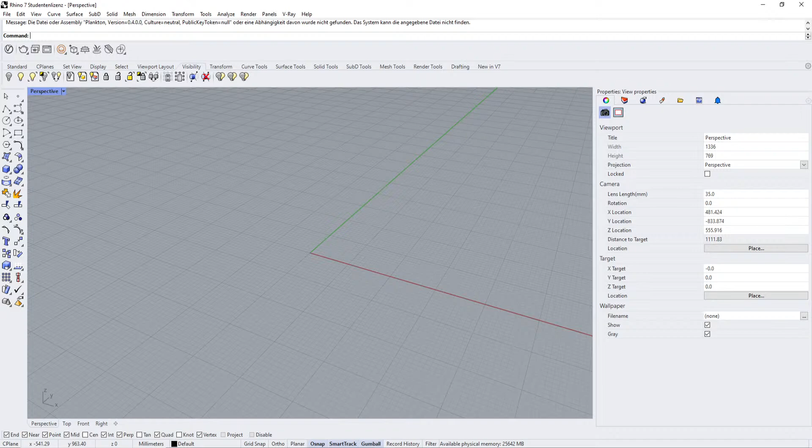Okay, I'm starting Grasshopper here right now. And while we're doing that, I think I might want to sketch out the things that we want to do as well. All right, hope you can hear me right. Yeah, I'm also fine, man. It's been a long time since I did the last video, so I think it's about time to do one.

So I'm really looking forward to this today. I was thinking about making a direct video, but I think we will do a stream instead. But yeah, I'm doing fine. How's the summer going for you if you are in the Northern Hemisphere?

Yeah, I think no one did. It's, I guess, more exhausting. It's a bit exhausting in France and Luxembourg. Yeah, right now it's also not so nice outside here for me, so I wonder if that weather will keep going on like this.

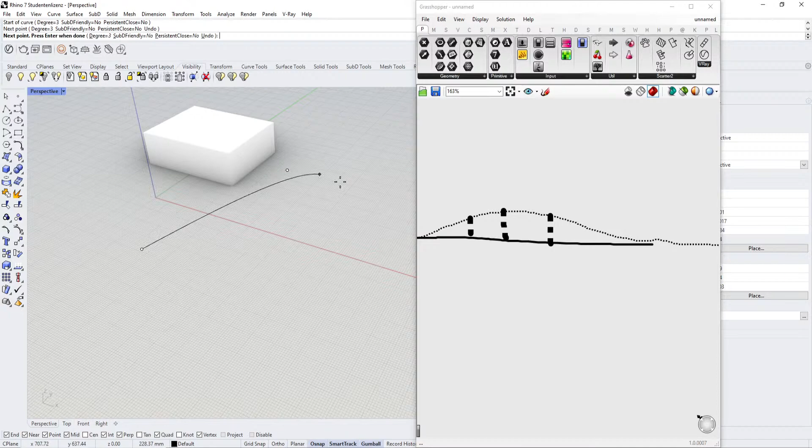So right now I'm having this idea to create kind of this train track thing. I had this idea today and I want to see if it could also work within Grasshopper. Basically, let's say we have a curve, right, and this curve would be like our train, having a closed one, and then we have also a second one.

So what I want to do is create the curve, and maybe also create a way of getting these things over, like when there's a cross happening anyway, so that one piece will go over the other. Other than that, maybe you can take a base plane and use those as well.

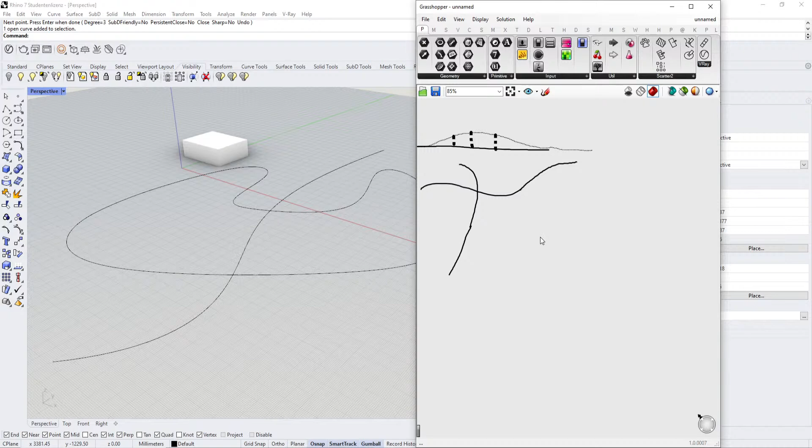I started reading Arturo Tedeschi's book of Grasshopper, Algorithms-Aided Design. Yeah, I think I read also pieces of that one. He has some really cool stuff, also on Instagram. I'm actually following him there and always see some stuff. He's actually hiring people right now to work, I think even remote, with not too much work experience, like 1 or 2 years. So yeah, it's a great book for sure.

So right now, maybe we can put this off for later, but at least for now I want to just create those train tracks. So do the offset curve, and maybe even do a loose offset, but at least for sure at the XY plane. And we make a distance, train track offset.

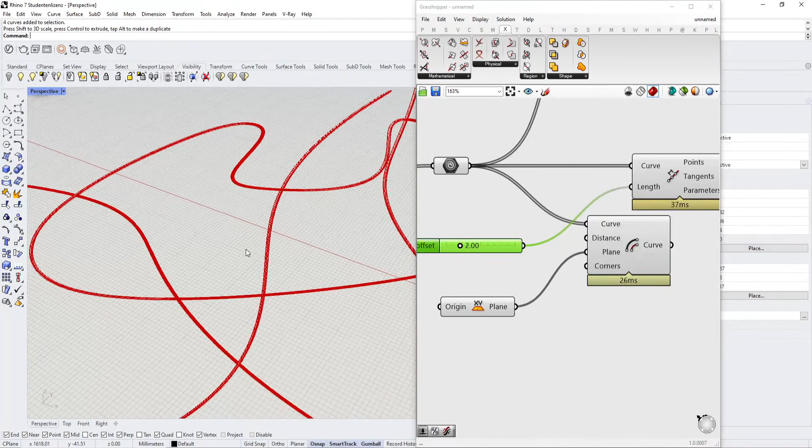And we also want to divide by length and create those points here. Oh, they're very small, I should make this a bit smaller. I guess I kind of messed up the scaling here, but it's fine.

Because what I want to do is basically have this rail, and then on the rail you have... it's the other way around, never mind. You have the rail, and then you have the things under it, right? And I want to create those now, and then make an offset of them, and use them there as well.

And I think, let's have then... they're looking at here in millimeters, right? Let's just change the unit settings and not scale. And then this will be like the distance of the train track, and we also do a -1 and divide it by 2, and divide this also by 2 because I want to have it go both ways.

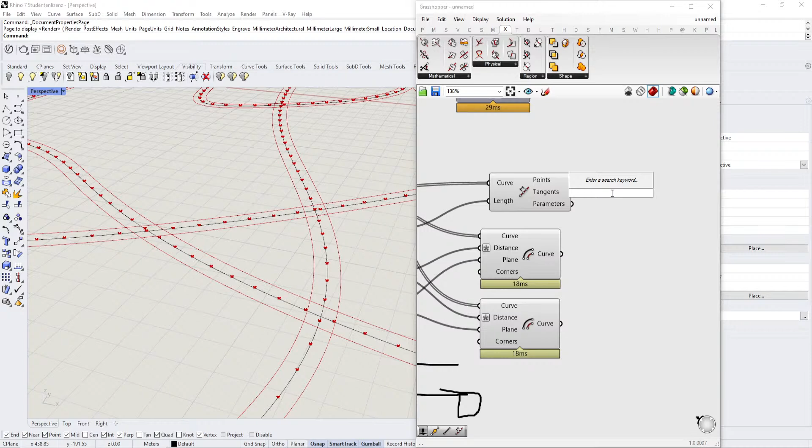So now we have the offset in two directions. So this will be like our base line, and this then will be our tracks, which will be defined by the vector in a way, because right now we have the vector of the tangents, and we're going to use those as the main point, and those will then be a plane that will be constructed over it.

And the x-axis, I wonder if I even need to do that... that looks fine for me at now, but I want to maybe — how was this called again? Vector plane and the plane normal, and I will take the origin.

No, can I wait? I want to orient. Or we can also maybe take the dot product of it, and then dot product — no, cross product, right? And take the z vector in there, and use it as the... so they're now always facing downwards, correct? Looks like it. So maybe let's make this negative so it will always face upwards.

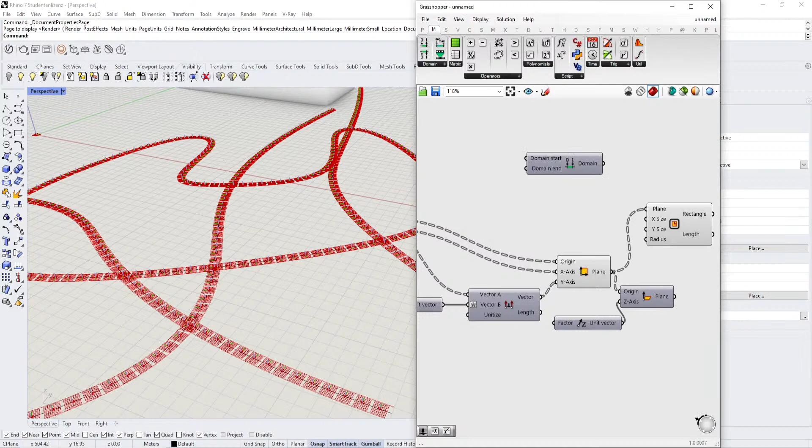Where is it again? Here. Construct domain. And then we're going to construct the domain over here. We have the offset of the curve already, so we'll use this as domain start and end, and also put this into the negative. Maybe we should have a general addition too, since we want the train tracks a little taller, so maybe make it a number value. Or we can just do a multiplier, like x times 1.2, and use this as our x size.

No, as our y size, and then have a different amount for our x size. I'm kind of wondering right now because the scale is a bit weird at the moment, but I guess that's fine. Now at least we have our planes, we have our things here, and we only want to have those. I think I'm actually going to maybe make them just as big as those things here, so we can reuse this number slider.

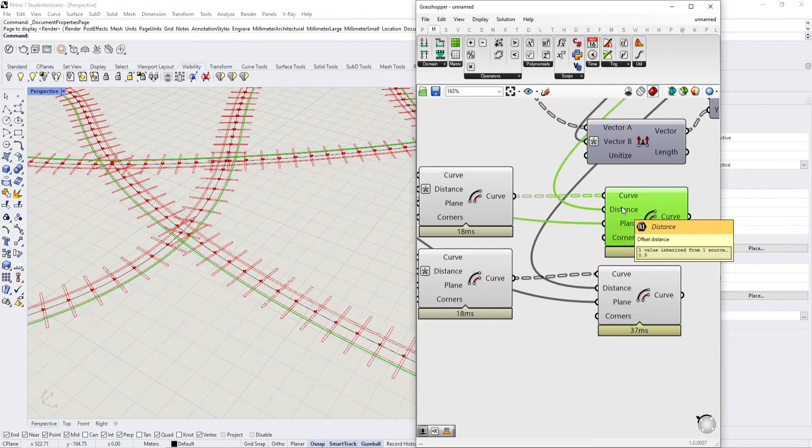Rectangle size. And we're going to offset it actually back, and use the same XY plane, and use the distance here. This goes then inward, and the other one should go outward, thus we need to do it negative.

And now we're also going to connect the endpoints, because we're going to take it like with the vanilla style Grasshopper here. So we're going to take a line here, and we're also going to take those points here. This should then create a point at the end. So now we have the first point, our second point, and those will all get merged together.

Is that correct? Well, I guess this one and this one, and then that one, and then this one. I think that when I join them anyway, it should be fine.

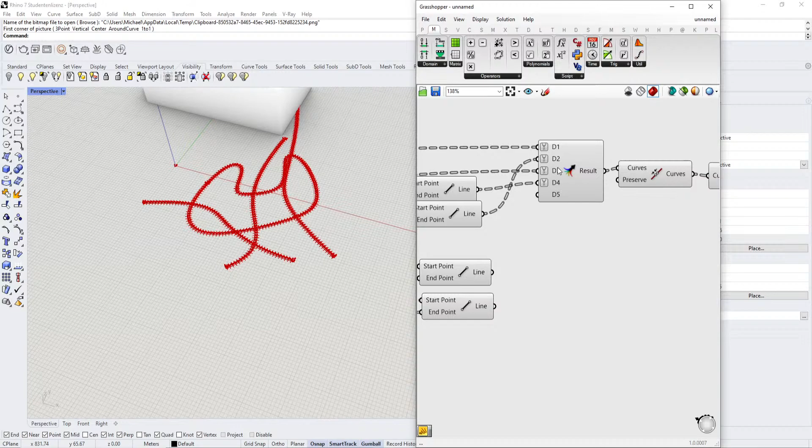Let me actually take a look. There's something weird going on here. Let's just go through the correct order. So this one first, this one second, and this one, and then on the other side. Just wondering why it gives me 3 at this one point, which is kind of weird.

Maybe I can simplify them here already. Okay, already stuck at this part. That's weird. Or maybe I can just graph them, that would make the order more correct-ish, but that did not help. Let me think this through.

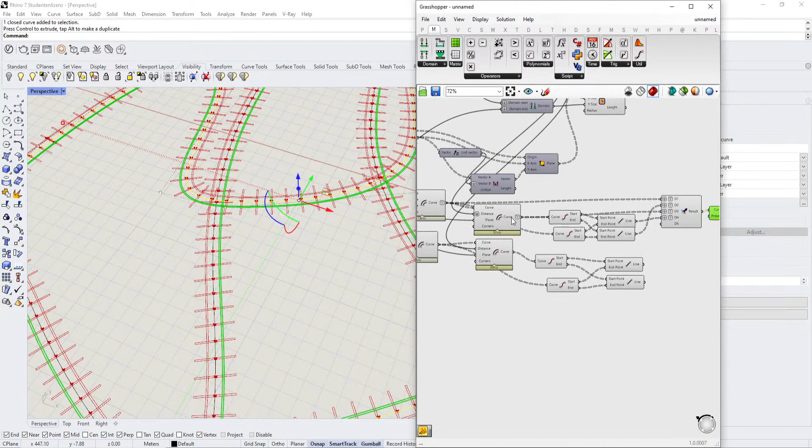I mean, why does it even give me here? Ah, okay. I guess it doesn't, yeah, obviously it doesn't work with, I guess the closed curve is the one making trouble here. I think I can just remove this one and then merge them back together. So for example here, if the closed curve is true, oh wait, closed curve, and then it should give me 4 results here, and one being true and one being false.

And now we're going to dispatch the curves. So I will take this dispatch pattern, take it from here, and then we're going to weave them back together. Yeah, maybe I should have done that over here. So that's the curve if it's closed, and then maybe we could do it even earlier.

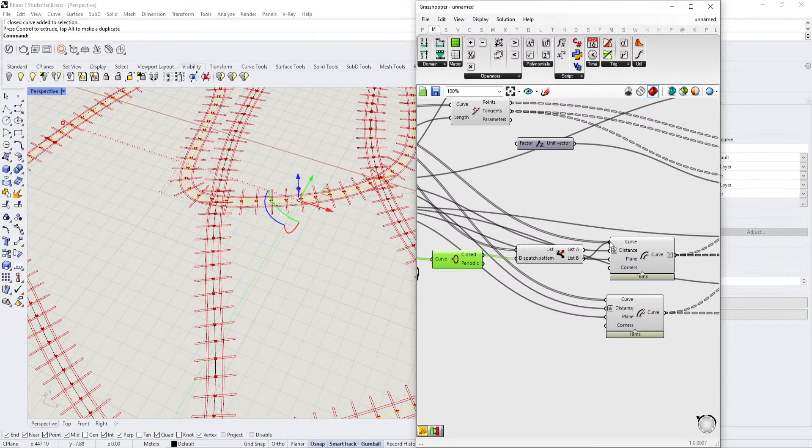I guess here. And then we have the curves here. And I'm going to put those in here. And now they create some nice curves. Okay, maybe I want to, wait, let's make this a bit better. So we have the curve already created now here, right?

And we don't, you have all the curves created here, and then we, at least here, it takes those curves here, but we want to take a weaving pattern that we have gained here from the beginning, and take those as the first stream, and then take those as a second stream.

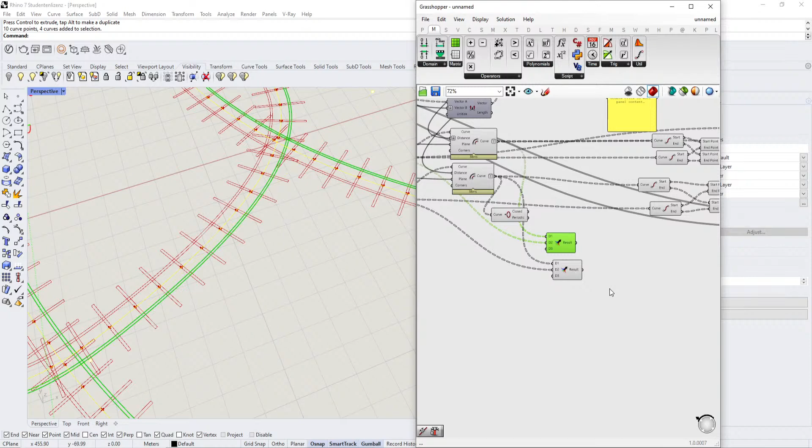And don't forget to simplify everything, because offset always grafts them, so we rather don't want that happening. All right, and then I guess we can merge this together again. It would result in 4 curves.

And then those can be joined or not. But we still should be able to, if we do boundary surface. Okay, now we are able to receive the correct ones here. That's great. But I'm going to use those here because those are basically only the right side, and I want to take then the left side as well with us.

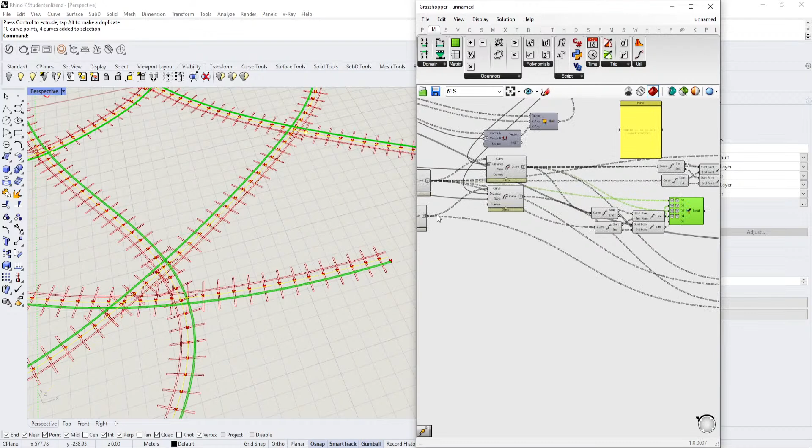Which might be a good idea actually to just, so here maybe we can just put those together as well, but let's do this. So here I need that one as the beginning, and as the third, and this one as the second, and this one, right?

Okay, it's the other way around. Let's do it like this. But I guess I also need to change this one over here. I need to change that one over there. And now I can still merge them together.

No, wait. Okay, yeah, this should work. And now when changing them around, obviously they will change with us, and I think even in the Z direction, right? Yes.

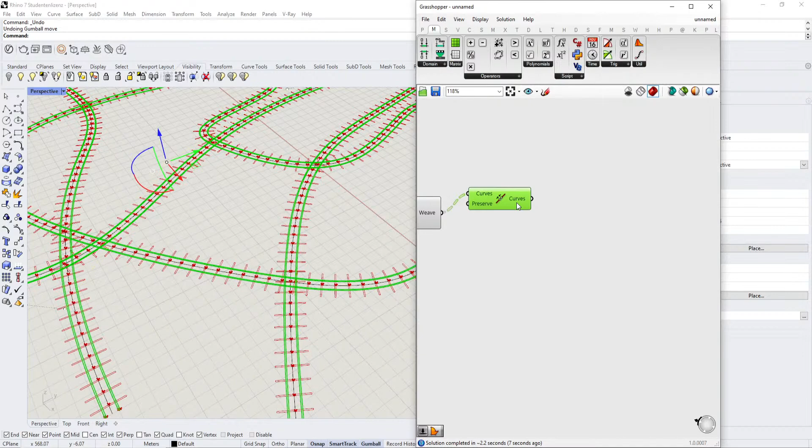But then planar surface doesn't work anymore. I guess another way to do it is with patch. Should obviously would not be the nicest solution, but all right. Maybe you can still. Maybe a better solution would be to wait. So if I have those, because it's always two things, right? Maybe it would be better to create a ruled surface in between those.

So we actually wouldn't need all the stuff here. Let me check. So yes. And this can then all go. And over here we can still create the ruled surfaces.

Wait, now it doesn't really matter at all, right? It's just this whole thing can go. Oh my god, okay. Because we created the ruled surface and it doesn't really care about if it's closed, like a closed surface or not. It would work whenever, and it would also work when I put this up here anyway. Oh well, the classic time saver.

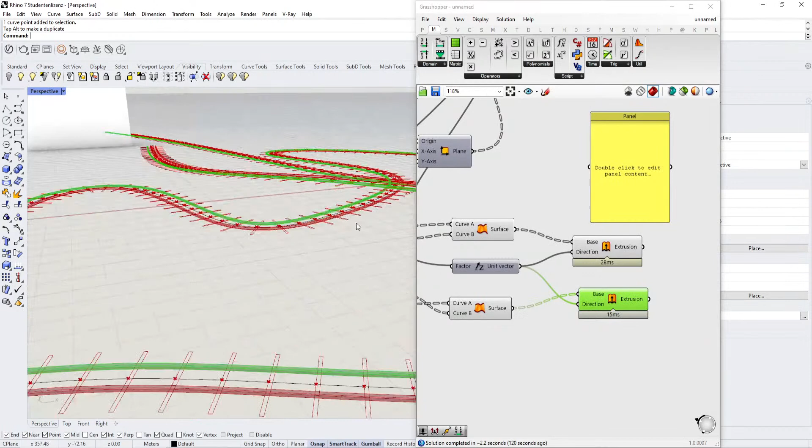Okay, cool. I guess those are like in the ground at the moment, right? That's why they look like this, but that's fine. Great. Now that we have that, I think I'm going to create the other thing that I was showing here.

So I think it would actually be great if we have a reference point directly. So let's create just a random surface around and rebuild it like this.

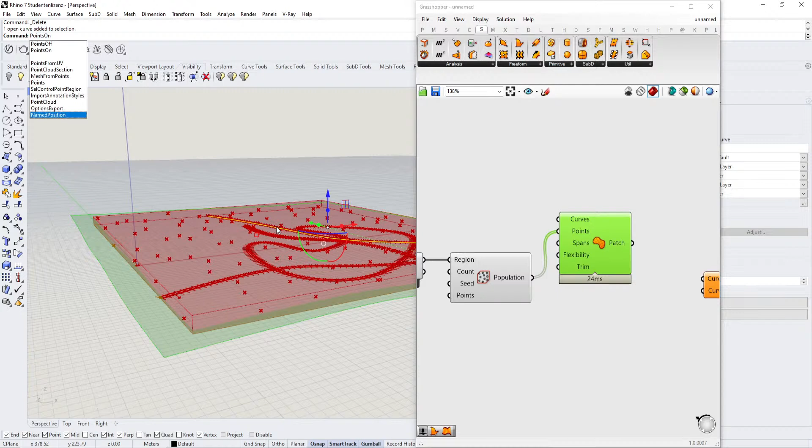So, and then I basically want to see if those points are on this, like if they are near the surface, then I will put them on there. If not, then not. This will all basically need to go before that, like before this part, like here.

And I basically want to see, okay, if it's higher, I will create some kind of stilts on it, like on the bottom. And if it's lower, then it will just be on the ground, basically. Okay, so this one is only here on the ground. And I might need to modify that in the future, this thing at least. Okay.

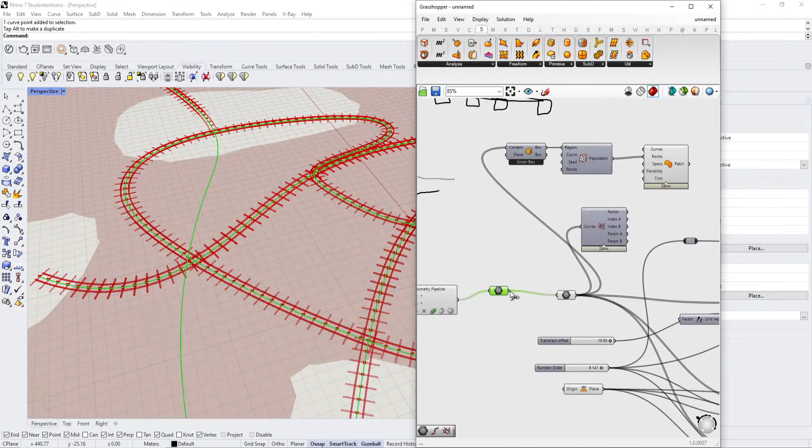Oh yeah, and then we also want to take those up. I think a good way to do is actually by creating, like, I think I have to divide this surface in a way. So let's move all this stuff over here. This is our track things part over here. This is the things. What does this do again?

Oh yeah. With train tracks. I'm not a train expert, by the way, so bear with me if I am making some assumptions here which might be completely wrong, and I'm sorry for that.

Okay, and then we also basically need to see what's the distance of it on the thing. So we're going to divide the curve, and I think I'm going to use a different one here. Dividing tester, and I'm going to make this a bit bigger.

And now we're going to see the point on surface. Can I have, I wonder if, wait, intersection, maybe there could be, this would be the B-rep, and if I make an SDL of those points and basically move them first like way up in the sky.

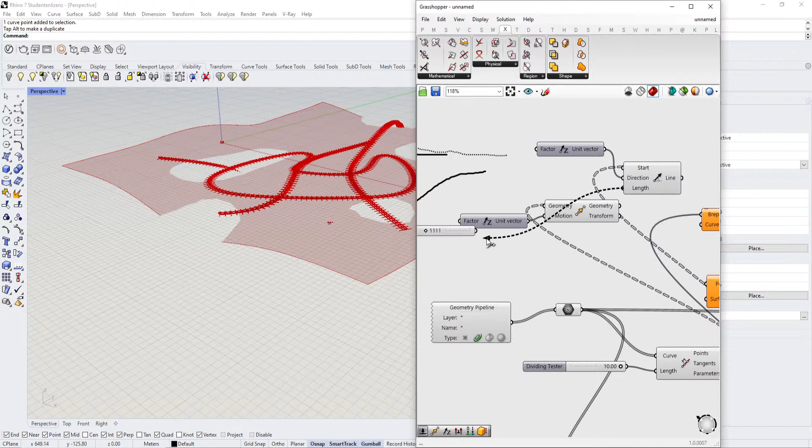And then make a Z direction and double the length of this one. And make this a negative minus X. And now we can see where it intersects. If it's a line,

Maybe that's a better one. So line, and that's the B-rep. Took some time, but okay. And let me see how long this would take if I would take this on. Really, it takes shorter? Why?

Interesting, I don't get why it takes such a short time, but oh well. And maybe you can also...

We deconstruct the box, and then deconstruct boundaries, deconstruct domain, and this will be that here, and then we take the absolutes of both and add them together and use this as our main line tool.

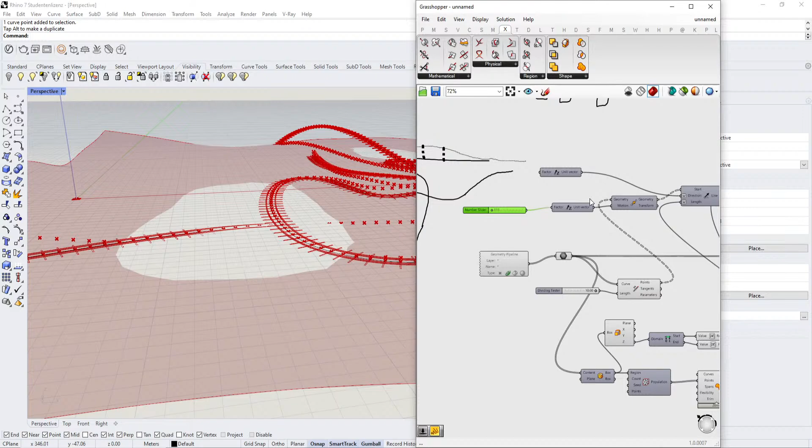So, okay, and now I basically check that I need to check first of all, I need to look at the distance. Let's just scribble this down. Check the distance, check if negative or positive, and then also there's one other thing.

Yeah, and then depending on that I need to take points from those ones or not.

So I do a vector, and I will use the beginning points here, no, those ones here, and I take those here, and if the vector now, I wonder, okay, I guess there's some, okay, and you trim the tree once.

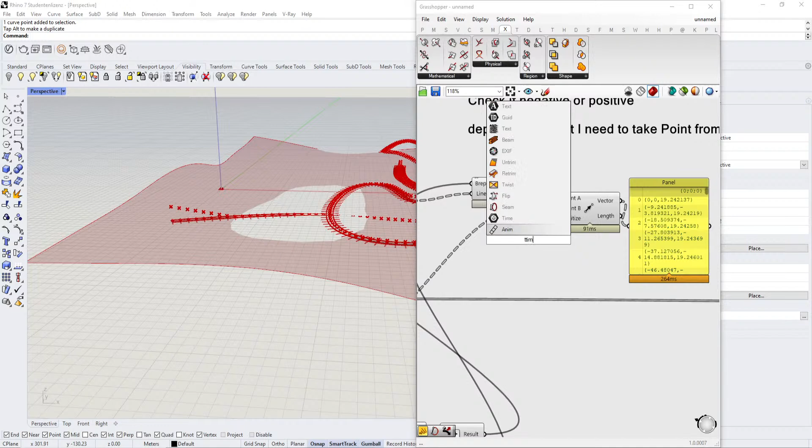And if they're positive, then it's fine, but if the z is negative, then, or the other way around, then we should need to take the other points. So I guess we're gonna dispatch them first, and then we're gonna, well, we also need to deconstruct the vector.

And take a smaller than 0. And this then gives us our two sets of points.

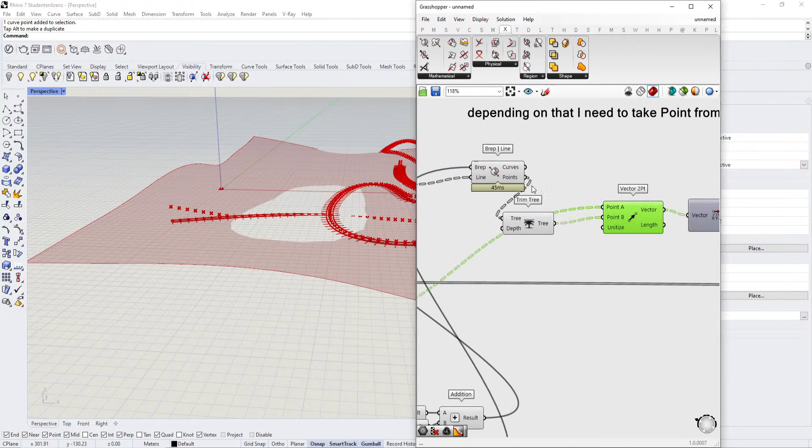And the list will be the list of points that we receive here, and we're also going to do the same thing with the points that we received from the beginning. And now we're gonna use the same pattern to put those together, but in the different order, like this.

Let's check if, so this one should be the one on, yes, and the other ones are those ones here, right? Okay, yes, it looks correct.

Great, and now it basically, even if I draw the curves on the top, it will always kind of take this weird surrounding thing.

I would just preview this pretty quickly and make this white. I guess it doesn't. I would have hoped that it would react to our surrounding here, but it seems like it does not.

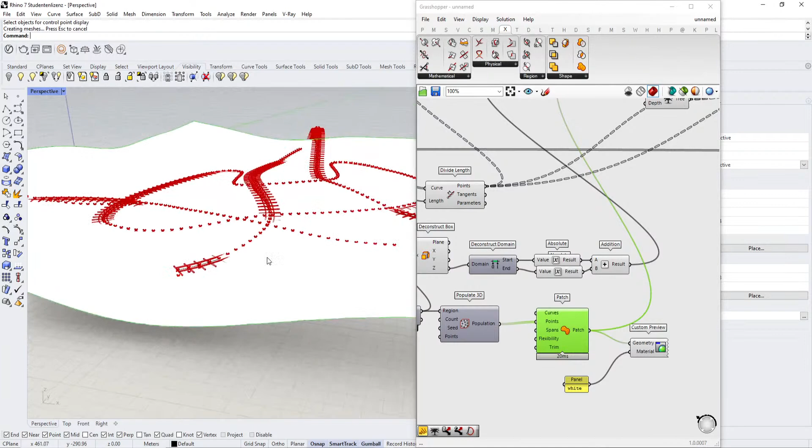Maybe just bake it quickly. Bake. So we can have just a visual representation at least.

So the points are either on it or not, and this then would result in our new curve. So we make a curve from primitive, and then we just take, I actually don't know which one we would take, but I think that looks fine, right?

So this will always be our nice curve, and in case you see, like here for example, it goes like up a little bit and then it stays in the air, but here it goes like further up the thing.

Maybe let's, can I take like a more... I would like to do this bigger. Oops.

And I want to make this with some weird, maybe shouldn't have hard coded this that much, but I guess it's fine today.

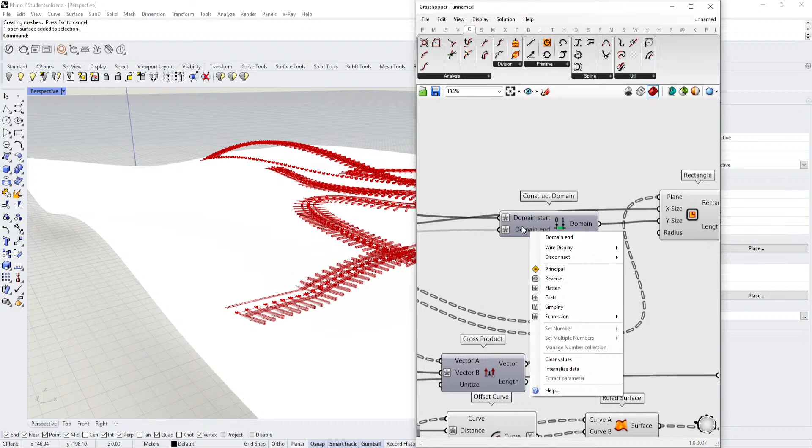Wait, what is it? But it should be divided by 2, no? Yes. Why didn't I divide it by 2? Divide by 2 times this much.

And then I can also make this thing a bit hard-coded bigger. All right.

Alright, now that we have our nice curves, I also have the components here.

Right now they're only going like straight on it, right? So this could be a problem.

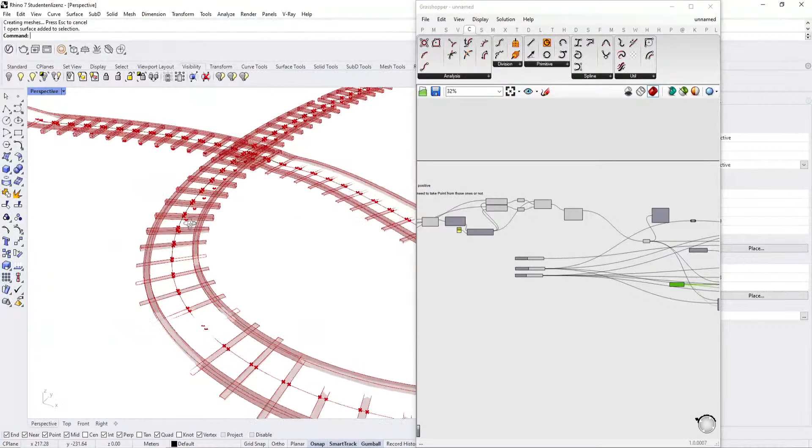Because right now it goes in and that doesn't look so pretty. I didn't think of that, of the inclination, if it's going to be sideways.

I wonder if that can be fixed. So you're constructing the plane like that, and maybe we could technically use the z-axis like this, right? And I guess we could use point on surface, and then use the UV point. Okay, that's possible.

So that's the point, and the surface would be that thing. And then we are getting the UV points, and wait, point on surface.

Maybe like this, yeah, surface. That's the... why did it all disappear? What the fuck? Why is it all gone?

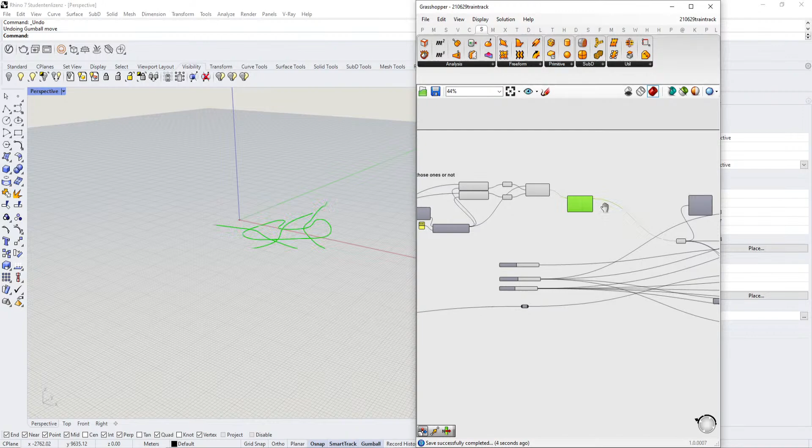Let's save this first. No. Let's try to re-establish that. I wonder why it's all gone though. What the fuck?

It still sees them, but it doesn't see them over here. Let's try to save it, and then maybe I will reopen it. Oh well, that's kind of weird.

You see, did you do like a clipping plane or something? I only have 4 curves here and it shows them here, but if I want to move them, it doesn't want to move. I think this is actually a Rhino bug, to be honest.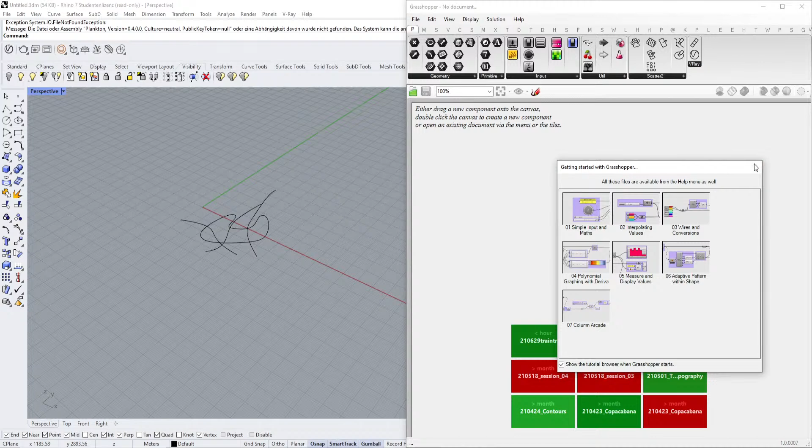Okay, anyway, I guess we will just use a backup file. Well, this issue is going to need to be resolved. Okay, let's save this, close that, and we're going to use a new Rhino and a new Grasshopper, and we're going to re-import this, and now it's lost again.

Okay, it has to do with something I did here, right? It was this one. Okay, well, why is it happening?

Let me check. So we have the surface. I want to evaluate the surface with that point, and it just removes it. I mean, I think it gives me what I want actually, but that's not good.

Wait. Maybe if I... Okay, that's like the weirdest bug ever.

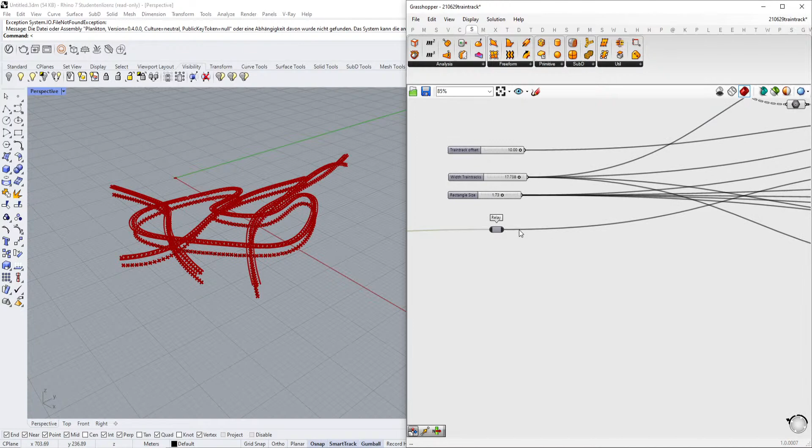Okay, we have the surface here, and the surface exists. But here it doesn't give me anything.

Well, maybe there are different ways of doing that. So I'll use this. Guess that should also work.

And then I do this, not negative. And if I have the surface now, just let me bake it again. Oh yeah, and now it seems to work. It basically takes the inclination in there as well for going sideways, you know?

And there's here an issue again with the closed curve. I wonder what that is. Okay, it makes sense because it goes around and then...

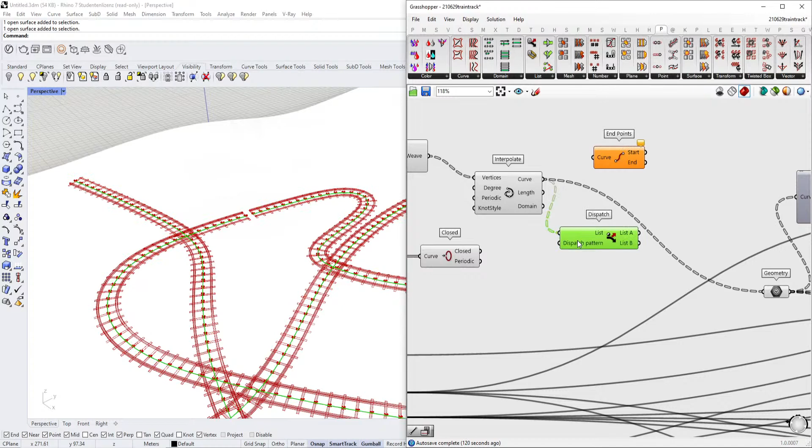If it's a closed curve, which it is, so you're going to graph this.

And then we're going to use a line here, and we're also going to join those, and then we're going to weave them back together with that pattern.

And I wonder if the streams will be correct. Seems like it. And this then should close that one as well. All right, open and closed curves, a topic for itself, I guess. But nonetheless, so far it works out fine.

Great, what else did I want to do? Okay, there are two more things that are interesting. First of all, intersection points.

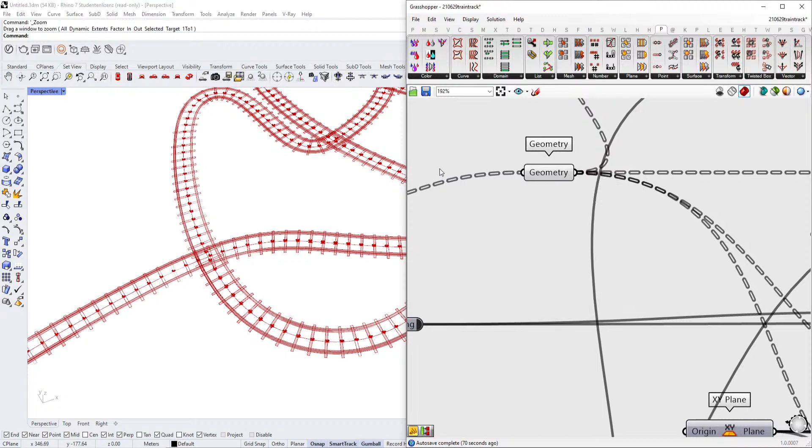Great. And yeah, I might want to also just move them always up a little bit, to be honest, but maybe that's fine for now actually.

Okay, now that we have that, I think I want to create those kind of over things, and then I also want to create things that go over if they intersect. We had this in the beginning.

Let's maybe just mark those here. So that's our 3D creation part. And this is our bounding box, I guess. No.

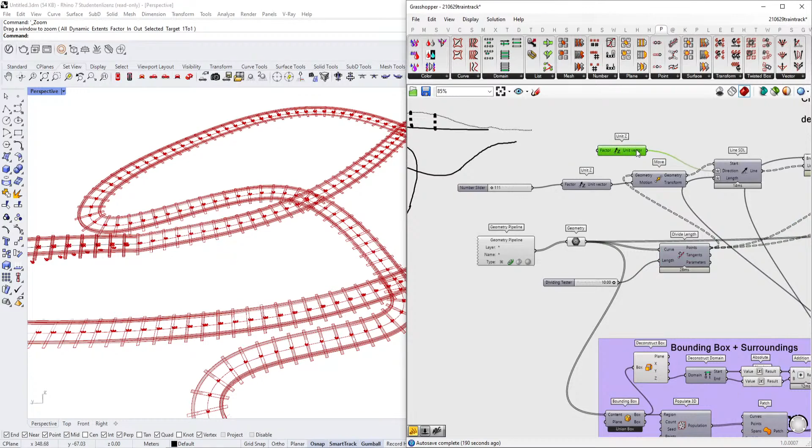Okay, and I think, yeah, so right now we have the situation here, right, with the weave structure of our things that are on top.

And I guess we can take this structure, things that are higher, and then we need to use - I think I want to have then those points.

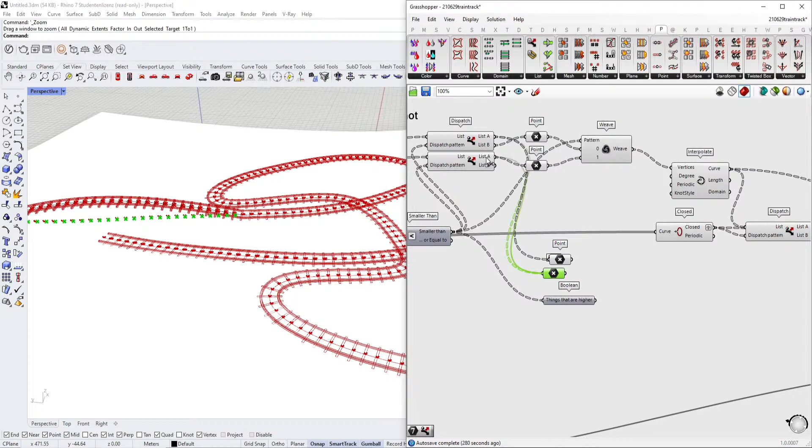And I also want to have, I don't care about the points that are on the bottom, right? So I want to take those points, and from those points as well. So those are the two which I'm interested in, this one and that one. So those two, and those are just like those things.

And actually let me just check out and try them out a bit further, see how it will use like, kind of, you know, let me actually change this to rendered, and I want to take the custom preview back from here.

Why is it lagging that much? It's not such a complicated thing, right? Okay, good, that works better. So if I'm creating lines that are crazy, like optimistic...

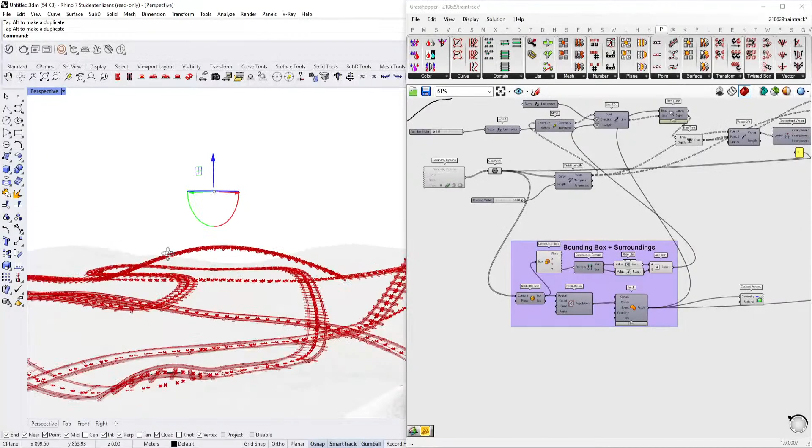That might be a bit, well, not the best option, but I guess that's how it is. And a bit sideways, but I think that's fine. I don't think I plan to be a perfect train maker here to begin with, so that's fine. Is it always hovering above it or only here? Okay, only here. I guess it could be because of the... let me take a look. So always taking...

We're always offsetting from the plane here, but maybe we can actually create a better plane, right? Because we have the normal here. Wait, let me take a look. I think it could be done another way.

Because now we're taking the plane of the XY here, and I think we can also just construct or take this plane. Would this destroy everything? That's my question. Okay, because the plane's always kind of going all over the place. Maybe we can actually do it differently, because right now we have the curve here, right?

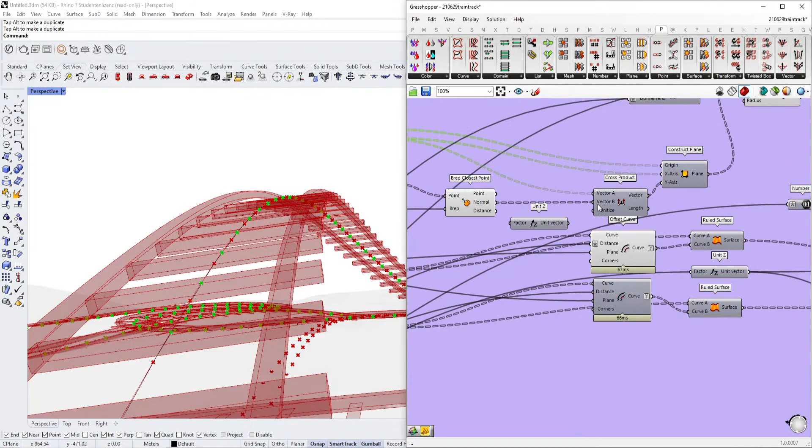And we could maybe move the points instead, because otherwise we'd always have those weird kind of overhangs here, right? So I would rather actually do it differently. Because I think we have already all the things we need, we just need to move them accordingly, basically. So we have the points here.

And I would move them not according to the tangent, but I think according to this thing, yes. And now I need to use the amplitude that we have created here, I guess. And the vector of this amplitude would be this thing - no, that thing here. And we need to divide them by 2.

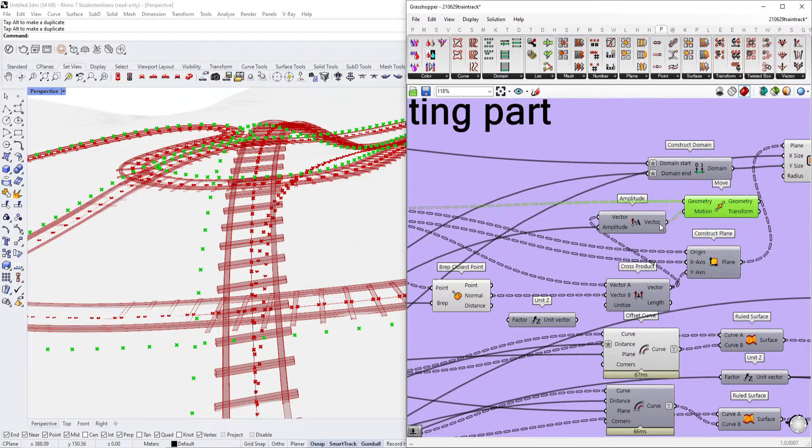And this then will be a curve that has to be created through a primitive or interpolate, like this, 2 times. And we can extrude it. Can we extrude them upwards?

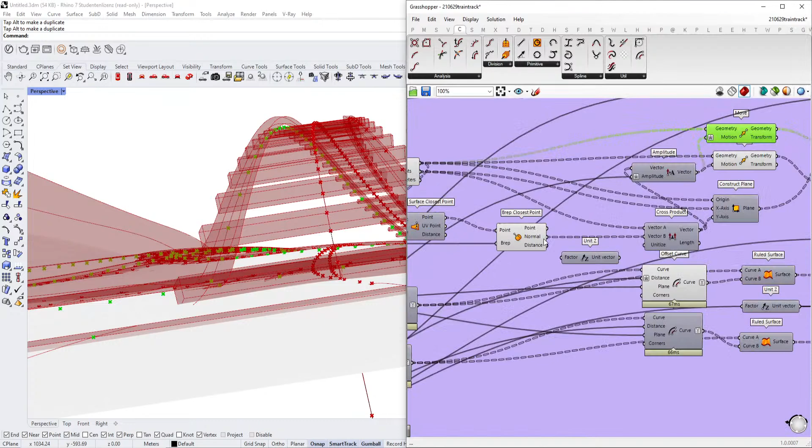I guess to be safe, having the things correctly aligned all the time, we might want to have them sideways as well. Well, that's nice for the train people. So then I guess we would move it according to this axis.

Let's remove those points here. Gonna move this according to... take the amplitude and remove the expression, and we will take the vector of the normal of the B-rep and take the amplitude here, yes, and that would be resulting in our thing here, and we're gonna remove this x divided by 2. I guess you need to put it negative.

And now it should be a little bit more correct. It's just a very tiny hint as you see here, but I think it makes quite a difference, to be honest, if you want to stay correct. And we're going to do the same thing on the other side as well. And now we have 2 very nice interpolated curves.

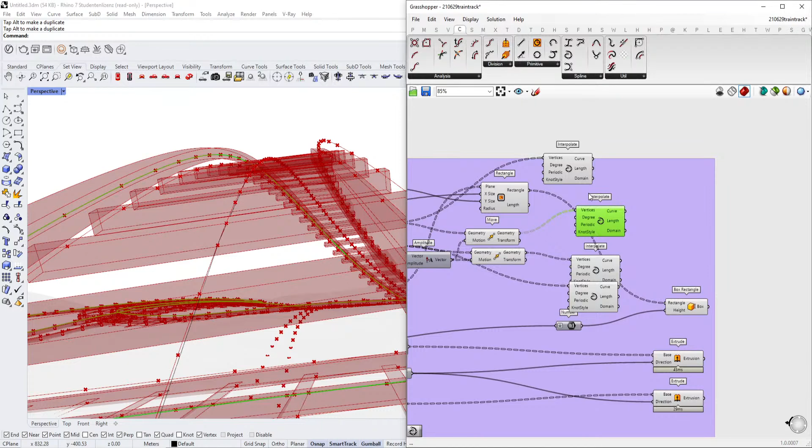So this, wait, yeah, we're gonna make a ruled surface out of this one. It's very cool to see those small details and have them happen correctly, because it would make a difference in the big term in a way. I think that's like a margin of error that we can accept here, because they might be a little bit weirdly overlapping, but that's fine.

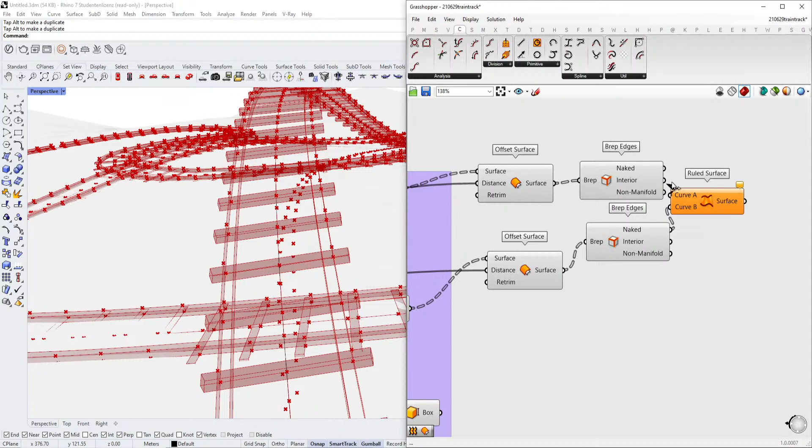All right, and the only thing I need to do now is, let me take a look at the offset curve. Should be correct though. And I guess we can make a ruled surface here. Whoops, nope. Why is it happening? Ah, yeah.

Why is it like less thick here? Or is it the same thickness? No, I guess same thickness, whatever. And I will take the same thing here - interior. And then merge those puppies together.

One. 2, 3, 4. Maybe simplify them again, I guess. And that should give us the best result as far as I'm concerned. So 1, 2, 3, 4. Gonna hide all that stuff here.

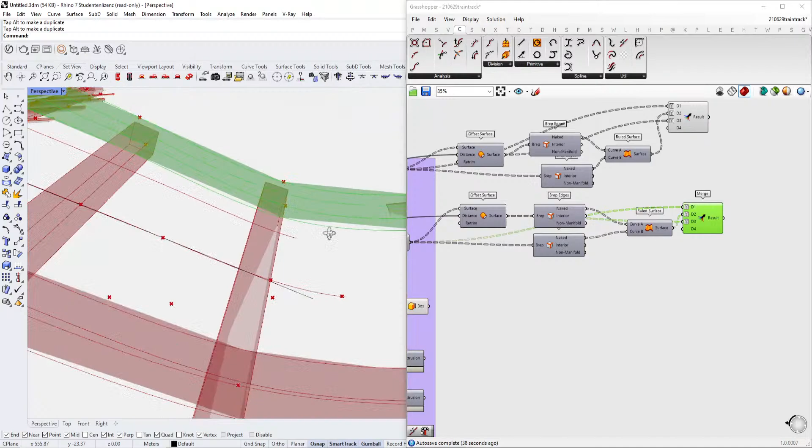And have a bit better train tracks happening. I think that's just a display. This should be fine. Great. Now that we have that, I would like to go on to the thing that we initially planned on. Remove all of that stuff. This can all go.

All right, and now what? Now I want to create those overhangs, and I already did my due diligence here, at least more or less.

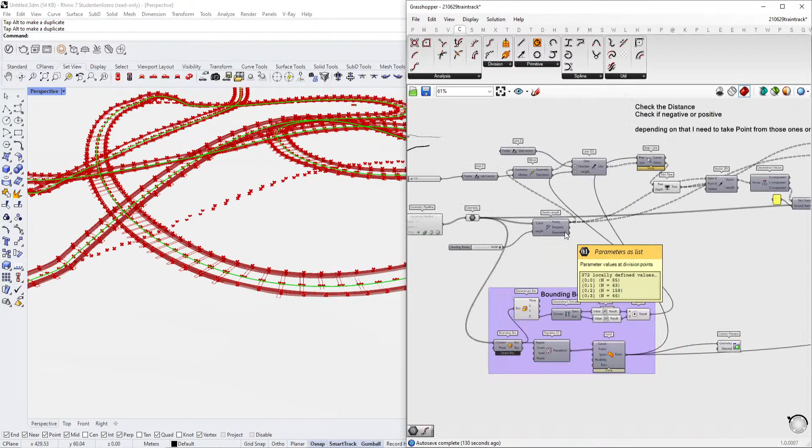I wonder if maybe it actually makes sense if we do this equally, because here, wait, here I divide the curve, and maybe I should not use... maybe I should use evaluate curve instead at this point, and use this thing here, point tangent, so it kind of fits. Yes.

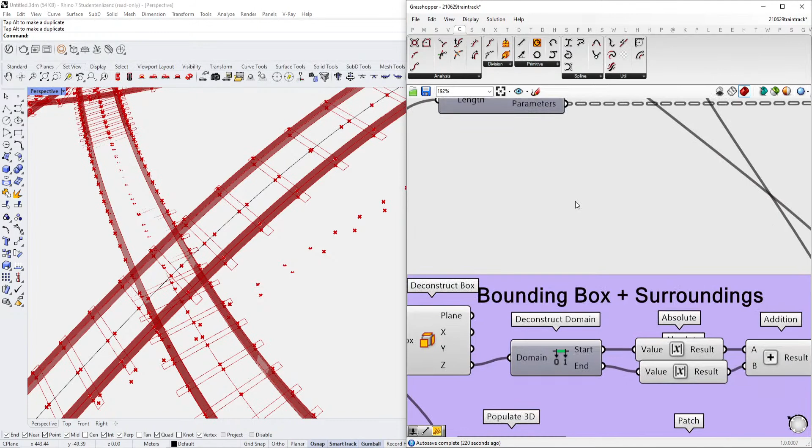Okay, it doesn't. And if I do it like this... I don't know if that's correct, to be honest, because I think it's still... Yeah, it doesn't go up on them completely. See?

Could there be like a divide distance 2D? That would be quite interesting. Anyway, let's just go back to this thing.

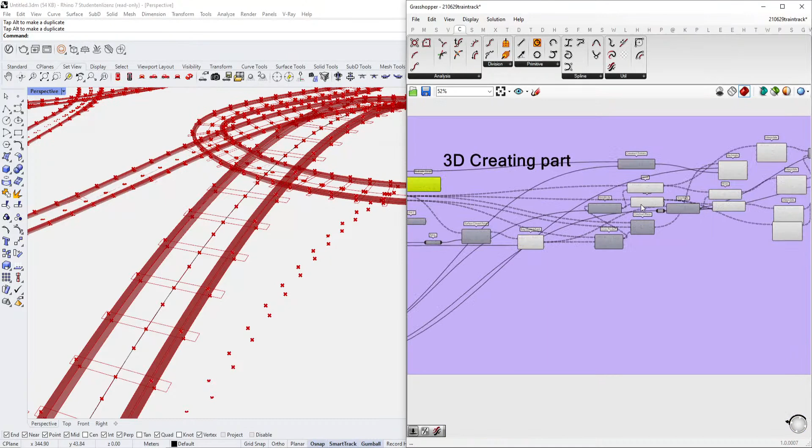Oh yeah. All right, and now we can finally create our little points here. But I don't just want to create them everywhere, I want to create them carefully. So there are two things I need to take in mind: first, if they're intersecting with one another, and if they don't, then they stay where they are. And if they do intersect with one another, then one of the two should move up or down. I don't really care which one.

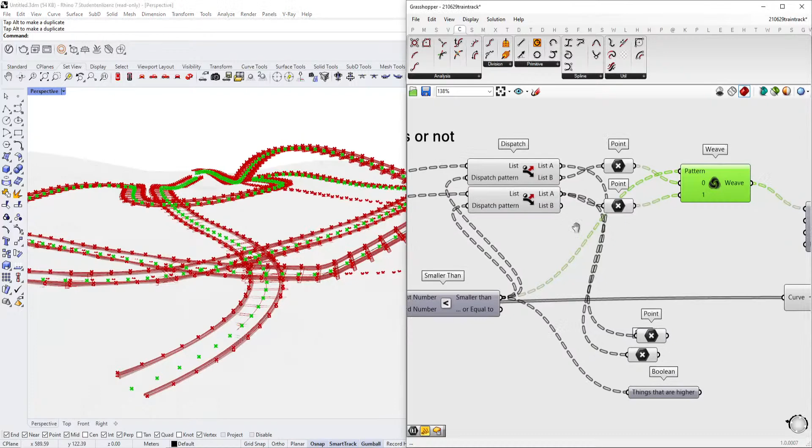Yeah. I wonder if I can... because I'm wondering right now, since it's so stiff on those parts, if I can move a few things up and a few things down. Kind of have this thing with a better logic, you know.

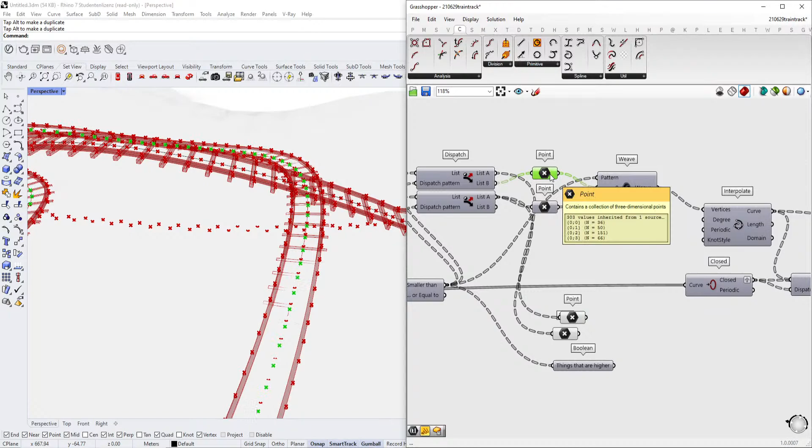All right, let's think about this. I mean, we can take a look at if it's close to any of the other points, right? Then it wouldn't work so well with multi-story ones, but I think it might be fine for now.

So we have this, and then we say closest point. So this should be then... those are all the points I got, right? The point I want to search for. And if the distance is smaller than... I guess we might need to take from this.

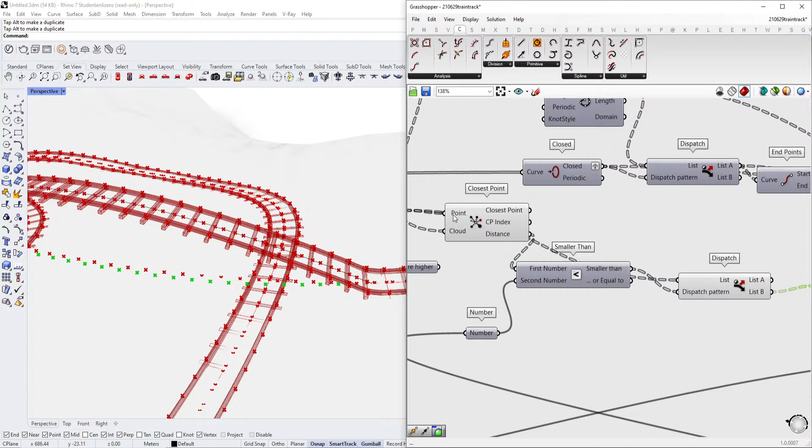So you're gonna dispatch those. Here. Huh? Maybe the other way around? No, that's too much. Wait, let me...

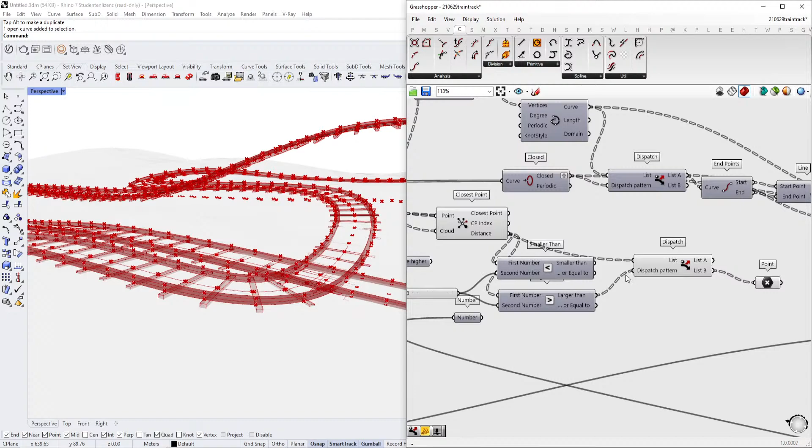Yeah, that shouldn't be the case. Mm-hmm. If this distance... okay, I had to bake it, flatten it.

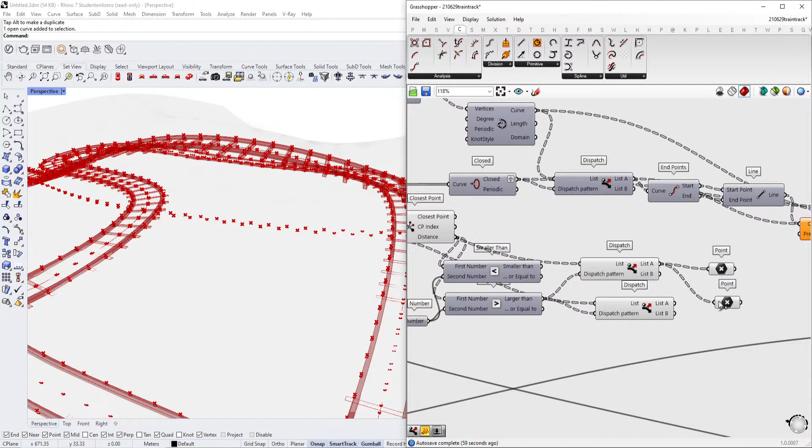So now we always remove those points, which is great. So I will always take this on these other ones. And I guess I need to also remove... do I need to remove some of this stuff? Wait, I also need to remove the ones from the top ones, so I guess those, right? Yes, that looks fine.

Just wondering about those points here. But that's really an issue from before. That's slightly above it. I guess I can remove them as well if the distance is under like 2 or something. I mean, this basically happened on accident here, right? Well, it should still create those, right?

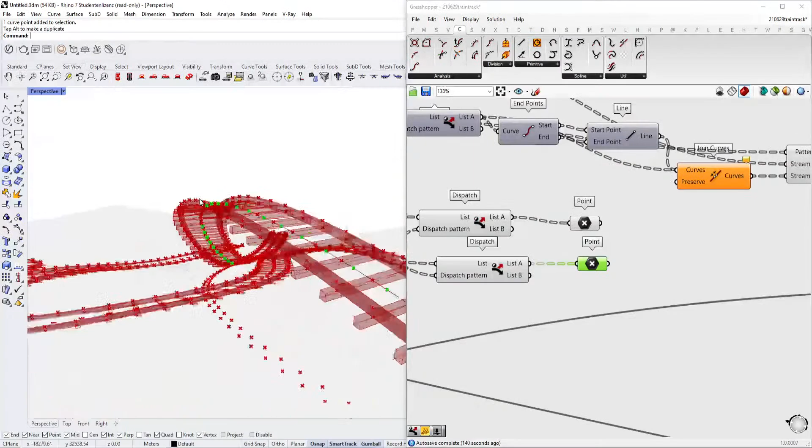So I guess I just keep them for now. And that means we are going to create a line. That makes bridges, yay! Whoa! That's what I meant, it will probably be a bit weird here in those cases.

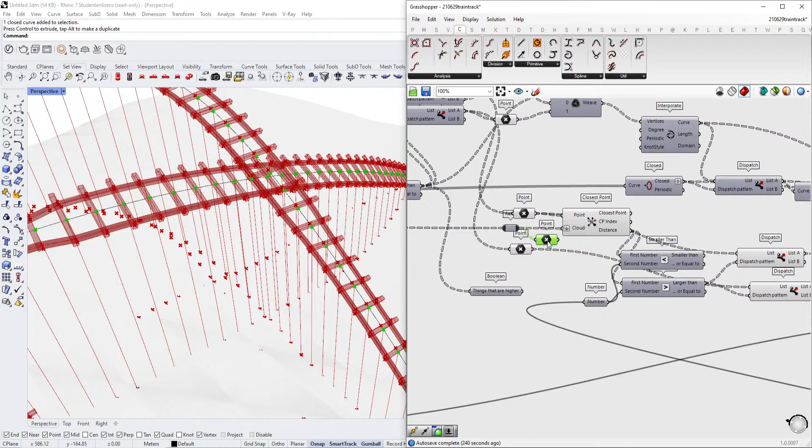Well, what if I just take... I took the points that were here, right? Why don't I just take all the points? I mean, now... ah, no, wait, wrong points. Those points. Okay, now it doesn't take any points anymore.

Well, nah, that's not really how it's gonna work. But here we have our main points. Before we just took it like this and took the ones out. Yeah, maybe I should just not use all those dispatch patterns. Anyway, let's just keep this for now as it is.

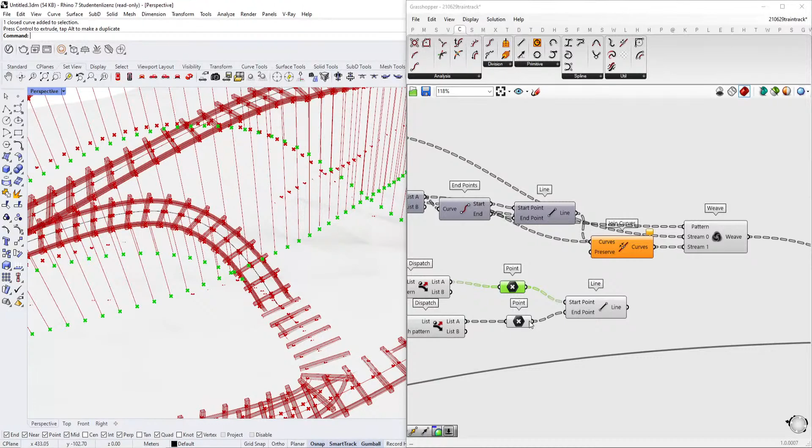And maybe I can just... because here I have those points here, right? I can just see if I would... point clouds, I can just see if they are close to several ones, the closest points. And I take these points to begin with, but then I also take them as a cloud. And if the count, I just do like 10, I guess.

And if the distance again is smaller than the other one... I don't know if that's the correct way of doing it, but then be higher than. I wonder what this value should need to be, and then we're just gonna dispatch that list here and again here.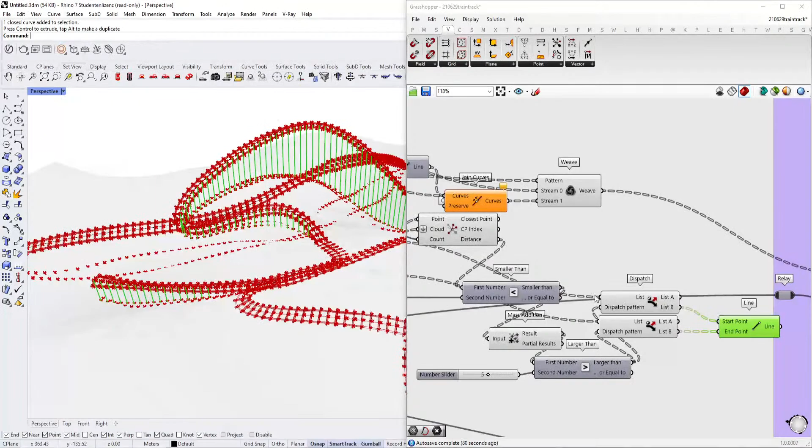Okay, that's super weird, but maybe I could do it different. Let's get this back how it was. So you have those points here.

I think there's the point cloud commands, so we'll take those points here. And if the distance is like, and I make this less. Now if the list length is bigger than 2 or equal.

Let me actually check. Because it would need to take, okay, like here. It's larger than 2. Then I guess we can take them. No, we are not taking them. And...

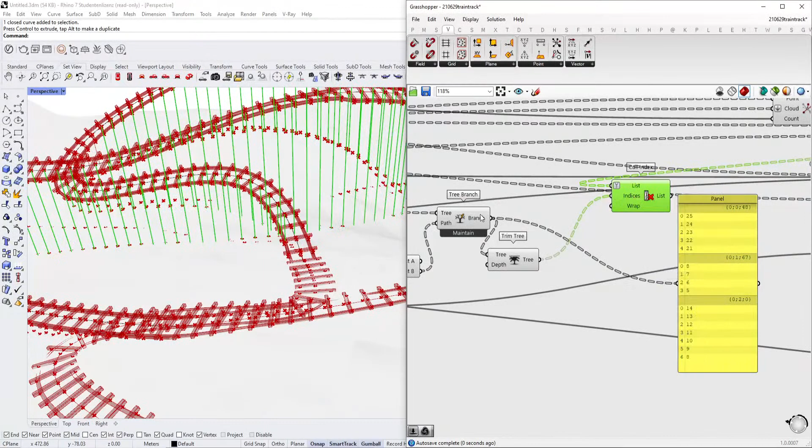Well, it removes a few, but it doesn't seem to be the correct ones. And let me remove those things.

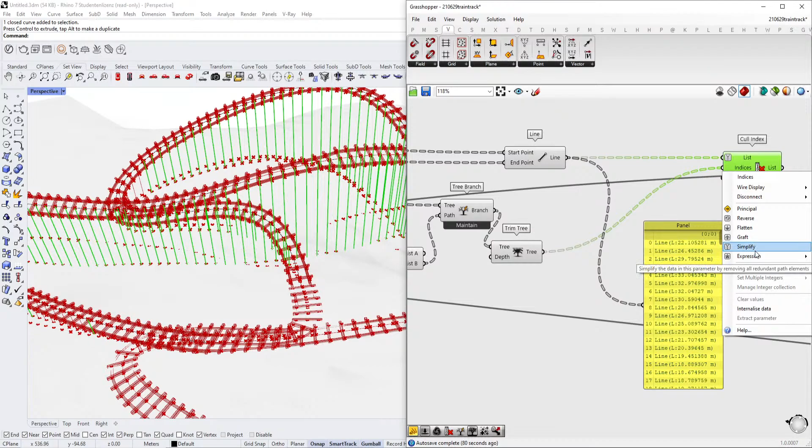Doesn't remove them on the correct location though.

Oh, I guess, I mean, if I flatten them, would that fix it? Yeah, I guess it would actually. I mean, if I think about it, we're losing the tree structure here, but I think I might be fine with that.

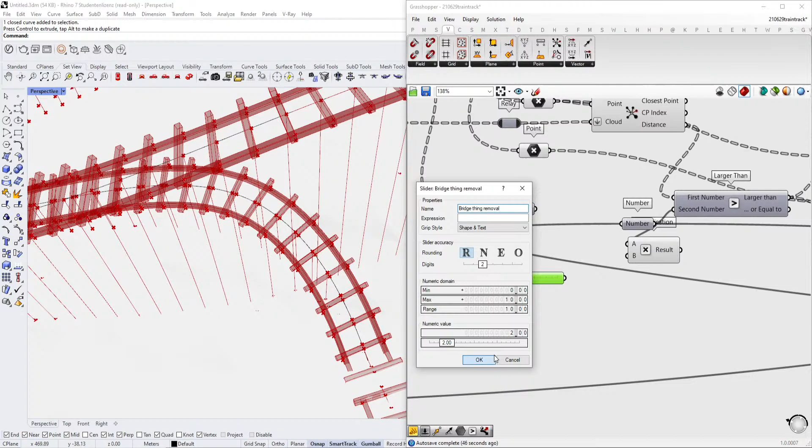Now let me take a look. I can maybe also multiply this by a certain amount. Bridge thing removal. What?

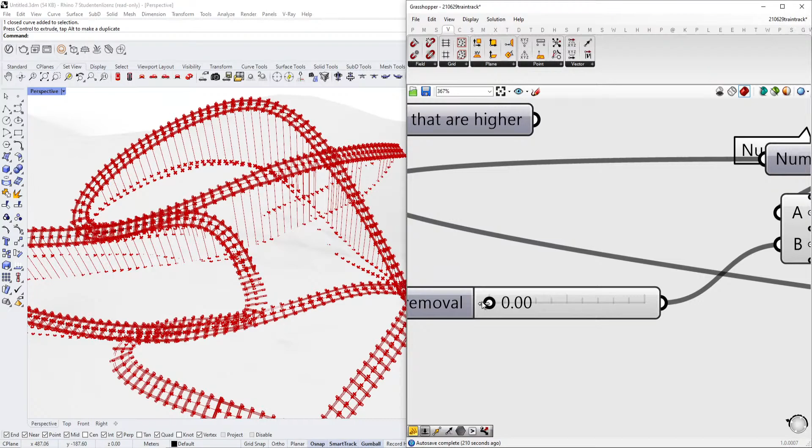Okay, why does it even... Those work fine.

What happens if I do a triple one, like a whole row? Okay, now they just remove all of them. Why is that?

Maybe because it's too steep actually. Because that kind of works for some funny reason.

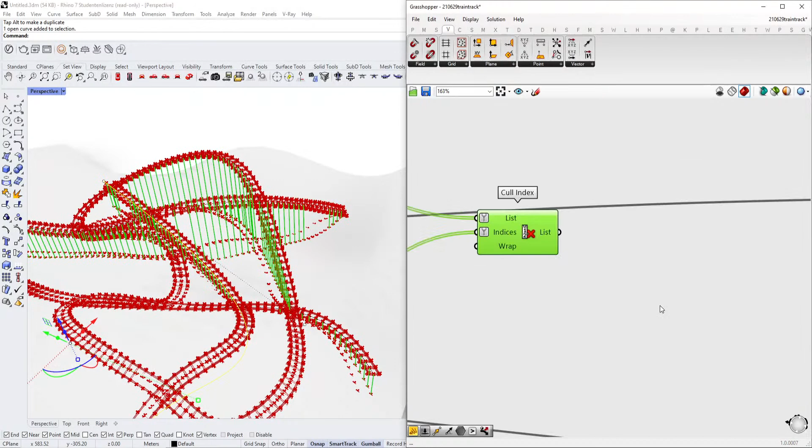Kind of Rollercoaster Tycoon over here, huh? It's pretty funny. Let me actually create another curve. I guess now it would create a complete difference. What happens when I do 3 above, like 3 on top of each other? It still works, I'm impressed.

Obviously we still need to do like a, well, you know, several things. That looks so weird, but I think it would make actually a good picture anyway. Okay anyway, this at least kind of works, so that's pretty nice. It's like going all over the place here, because it takes like the ground thing, you know.

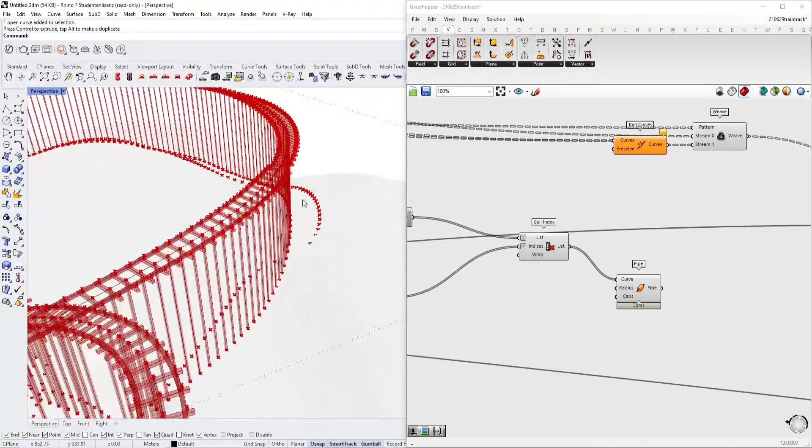Good, anyhow, it's good enough, you know, that's what I would say. Anyway, let's make this actually also kind of 3D.

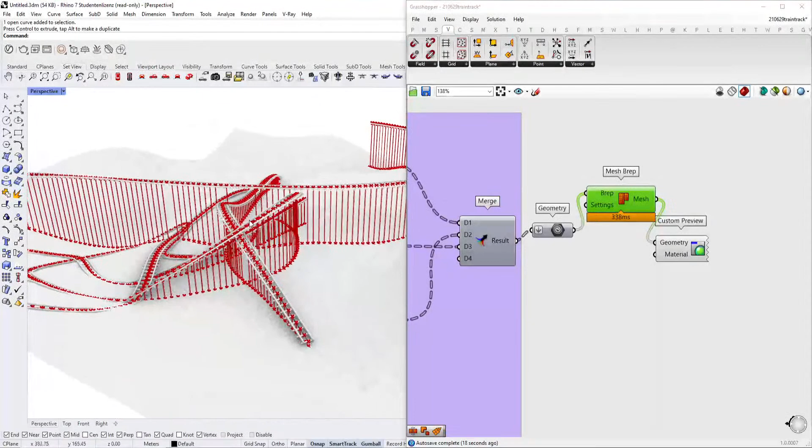Custom preview. What the fuck? Hello? What's wrong with you, man? What the fuck? Maybe mesh it. Oh well.

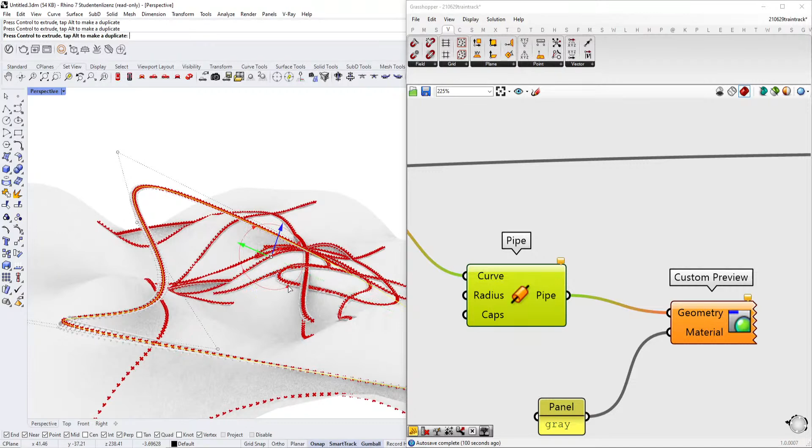Let's play a little bit here. All right. Cool.

Just want to do some cleanup, and then I think I could actually call it a day. Yeah, we did that, and I also want to.

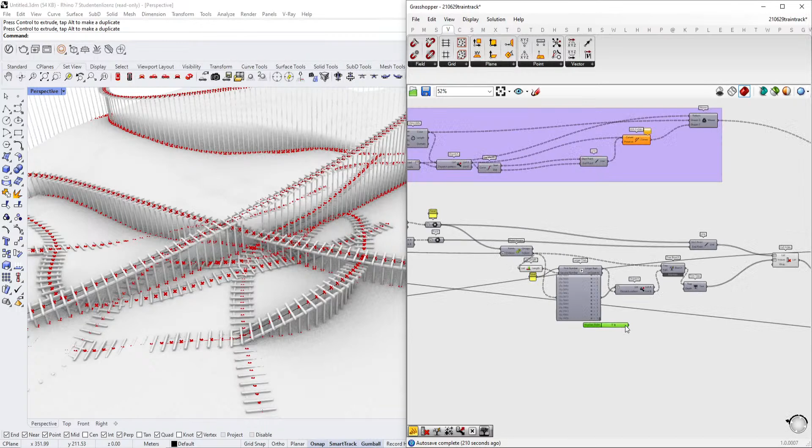And that's basically the creation of, that's the creation of, or the removal and creation of columns if pieces are in the air or intersecting.

And that basically puts pieces on the ground or in the air if they would be underground otherwise. Great, cool.